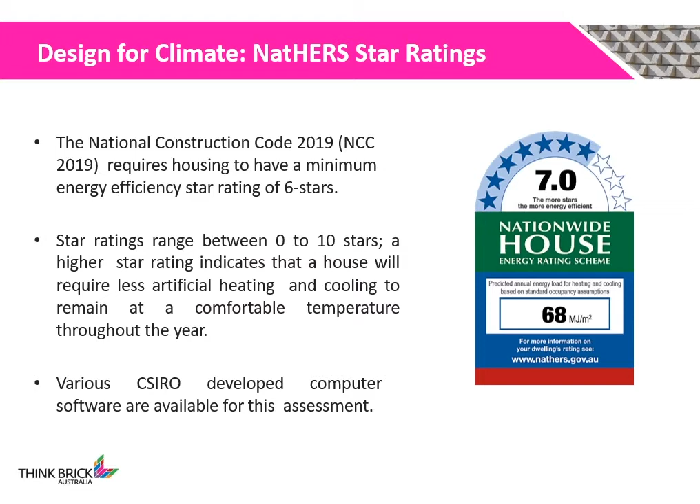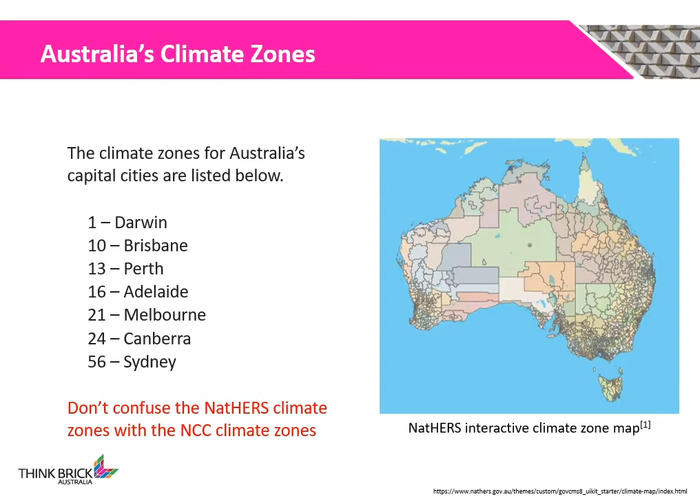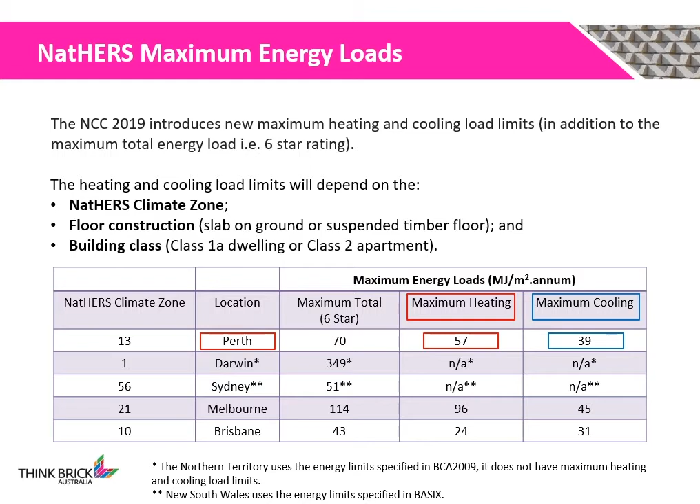Note that the Northern Territory and Darwin uses the energy limits as specified in BCA 2009, explaining the extremely high maximum total energy load. Furthermore, New South Wales uses its own measure for energy efficiency, BASIX, which is a different set of requirements but is accepted by NatHERS. We will briefly discuss this in the next slide.

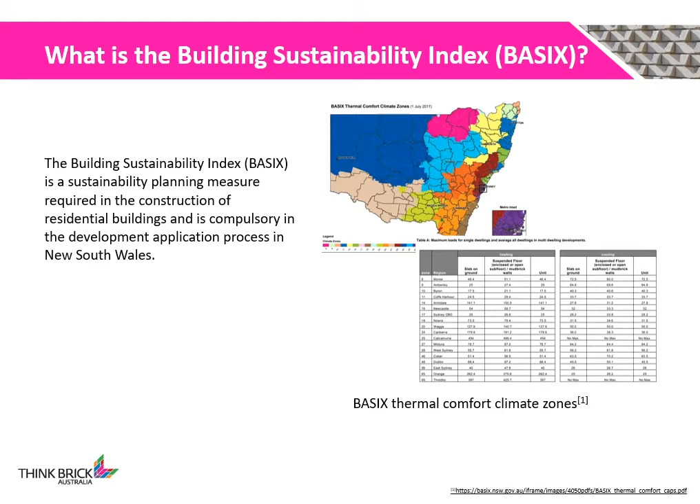The Building Sustainability Index, or BASIX, identifies design features that affect the level of energy consumption and water use in newly built houses or recently renovated homes. For New South Wales, BASIX governs the energy limits instead of NatHERS. The BASIX thermal comfort climate zones replace the climate zones used by NatHERS, and similarly, the maximum energy load would also be slightly different. More information can be found on the BASIX website.

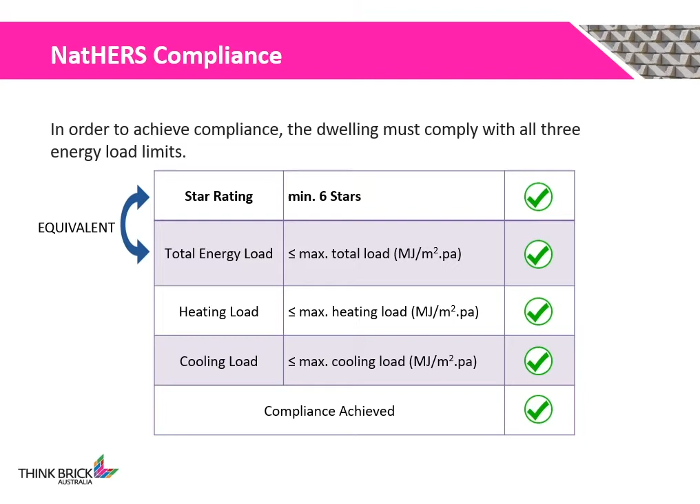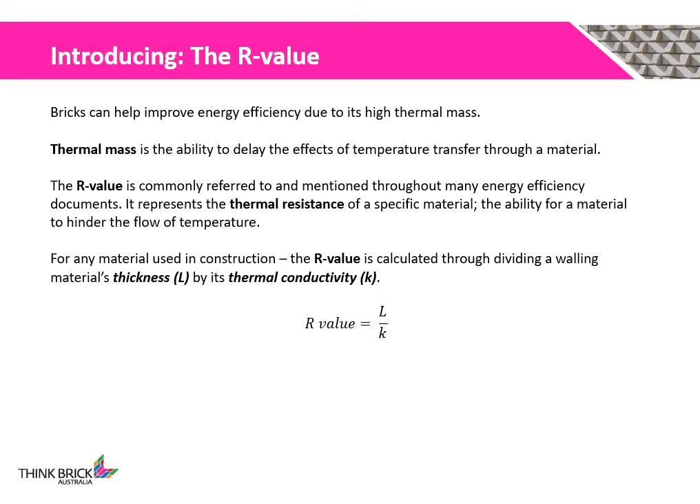The R value is the thermal resistance of a material, and thus it acts to slow the effects of temperature change. An R value is determined by the formula given: the thickness of the material in question divided by the thermal conductivity of the material. As brick has a relatively high R value and associated thermal mass, it exhibits the ability to regulate temperature throughout the diurnal cycle.

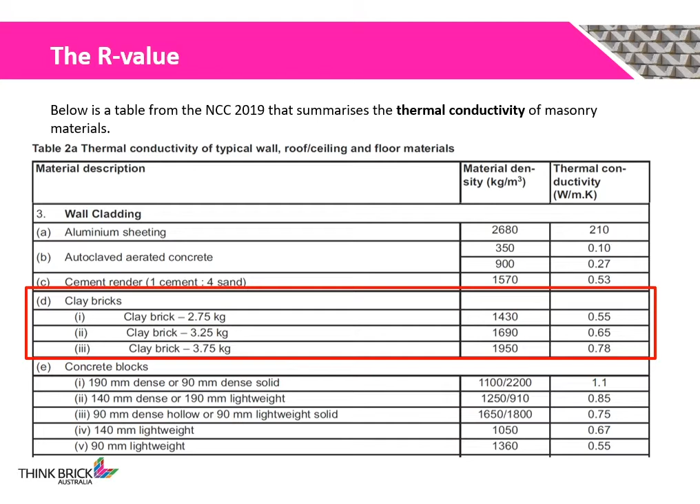A common question in the masonry industry is how the R value changes for composite materials. In this case, the solution is additive: simply calculate the R values for each different material and then add them together for the final R value. The following example showcases this.

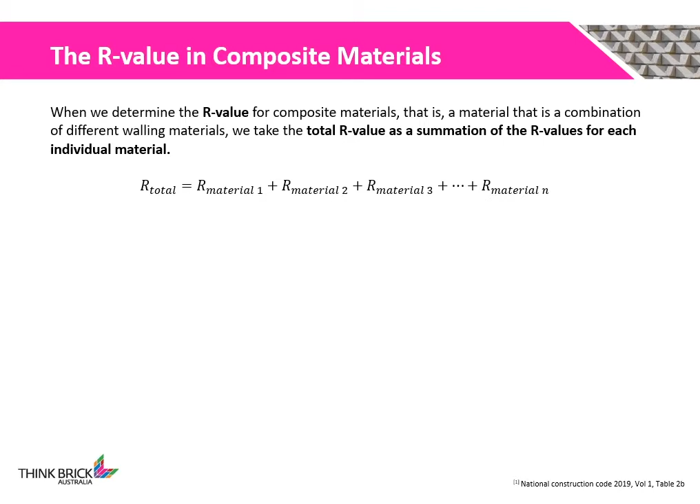Consider a double brick cavity wall with a 40mm air gap. We know that the width of a standard brick is 110mm. Assuming a 3.75 kg brick, it will have a thermal conductivity of 0.65 watts per meter Kelvin. The R value, as mentioned previously, is the thickness divided by the thermal conductivity. The calculated R value for the brick leaf will then be 0.11 divided by 0.65, giving us 0.17.

For the R value of a 40mm airspace that is non-reflective and unventilated, the NCC states that it will exhibit an R value of 0.17. The total R value will then be the summation of all three materials, including brick twice, once for each wall that we have. This gives us 0.17 plus 0.17 plus 0.17, and so the total R value is 0.51 meters squared Kelvin per watt.

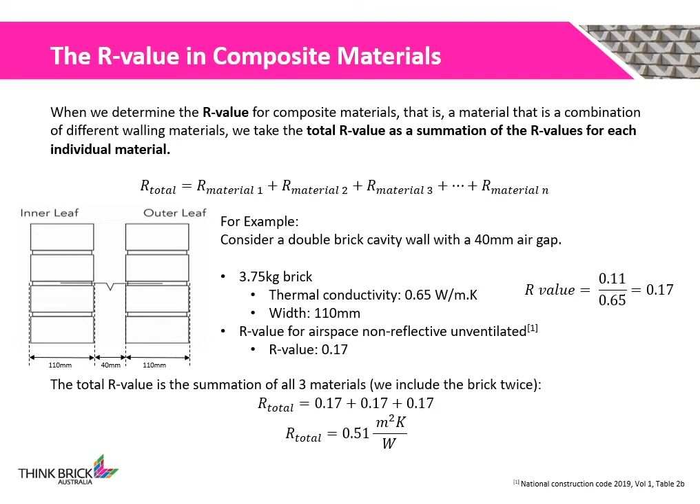An interesting note is that despite the air gap being almost a third the width of a brick, it provides the same R value. Air, as it turns out, is a very good thermal insulator.

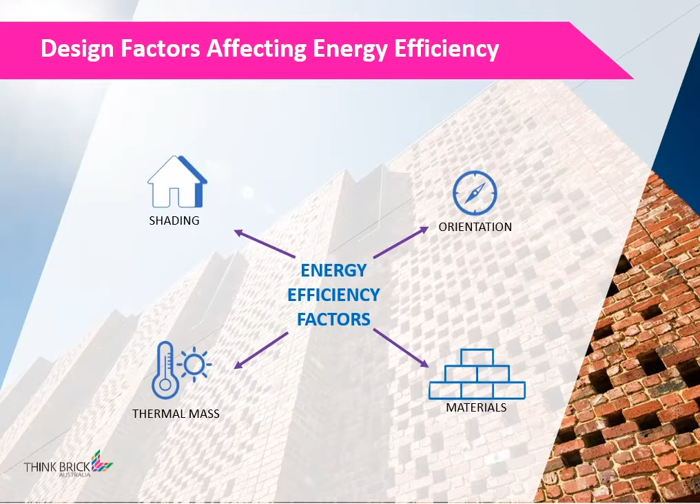In this following section, we will address the primary factors affecting energy efficiency. These include thermal mass, orientation of the dwelling, insulation, and shading. Do note that these factors are not exclusive; there are many other attributing factors to increasing energy efficiency.

Thermal mass is the property of a material to store and release energy. Using the idea of thermal lag, that is, the delay in time for the effects of heat and cold to become apparent through a material, thermal mass can assist in regulating internal temperatures throughout the day, absorbing heat in the day to release it at night when it is cooler.

Some materials with high thermal mass include brick, stone, concrete, and even water, as it can be used in water walls. Do note, however, materials with high thermal mass may have adverse effects in climates that have a constant temperature. In a warmer climate, you will absorb heat when it's warm, only to release it later when it is still warm. Thermal mass is an often overlooked factor in designing for energy efficiency.

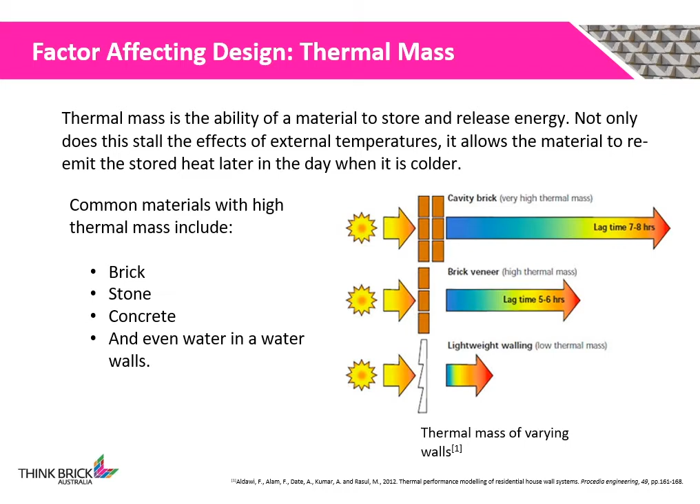House orientation refers to how a dwelling is positioned, and if it is optimal in utilizing climatic features to increase energy efficiency. Some examples of proper house orientation are positioning windows to catch the sun on colder winter mornings, or inversely, positioning windows to the north so you can catch a more consistent amount of heat and light throughout the day. Even positioning hallways to allow for an east-west wind may also increase cooling efficiency.

Do note that the arrangement of rooms within the layout of a house will also greatly affect the energy efficiency of the dwelling.

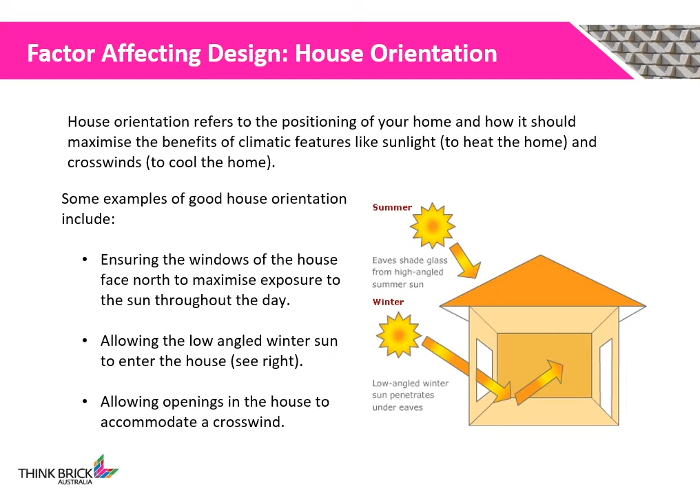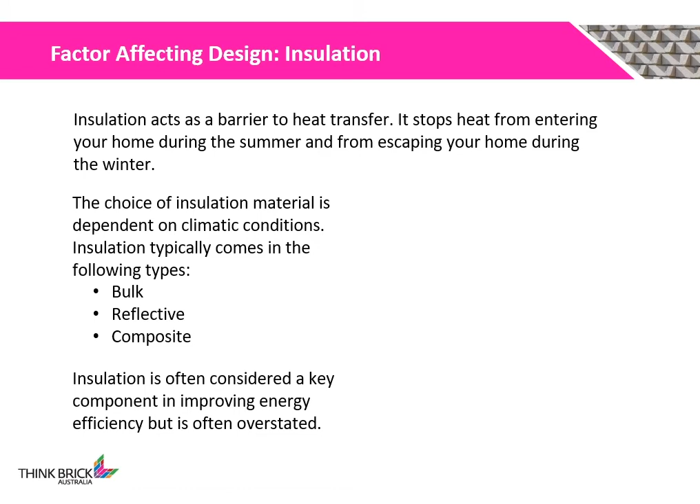Insulation is one of the most desired traits when considering factors for increasing energy efficiency, as it has the ability to stop heat, both from entering the home during the summer and from escaping the home during the winter. There are many options for insulation, like bulk, reflective, and composite, all with varying properties and cost. Although insulation remains a crucial component, it is an often overstated factor in determining energy efficiency.

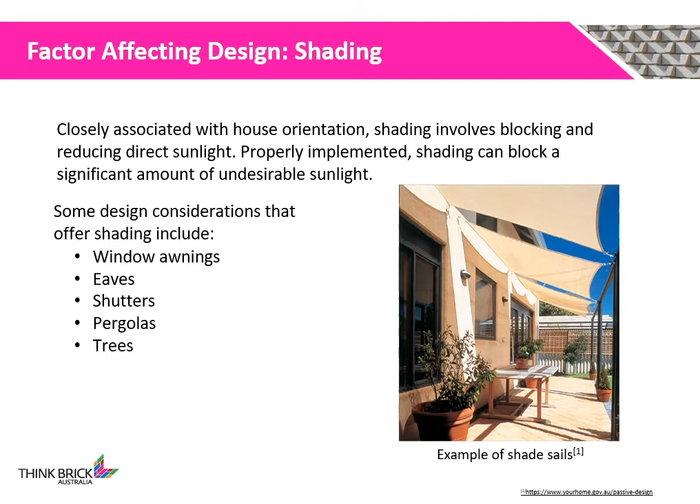Shading employs eaves, awnings, and other methods to either block out or mitigate sunlight striking the dwelling, effectively reducing some heating effects. Beware that improper shading, like blocking out the sun on a winter day, will result in more artificial heating required and a reduction in overall energy efficiency.

To reiterate, we have just gone through certain design considerations required in improving the energy efficiency of a dwelling. We do this to comply with the required 6-star energy rating as defined by NatHERS. Now we will see exactly how these design considerations play a part in improving energy efficiency in a build using FirstRate 5, a NatHERS certified software used to rate energy efficiency.

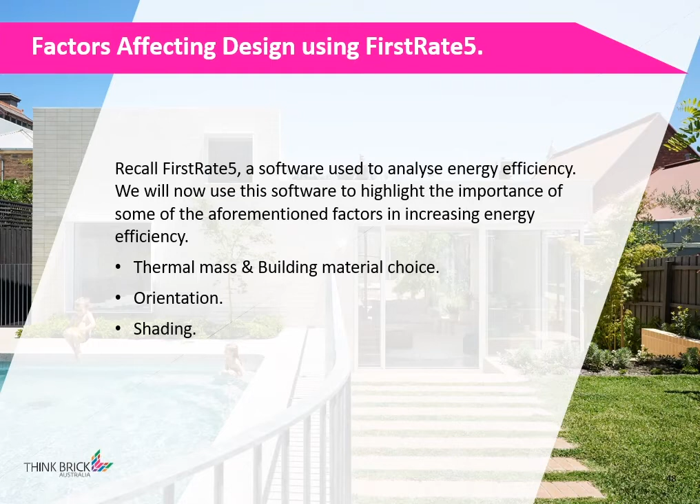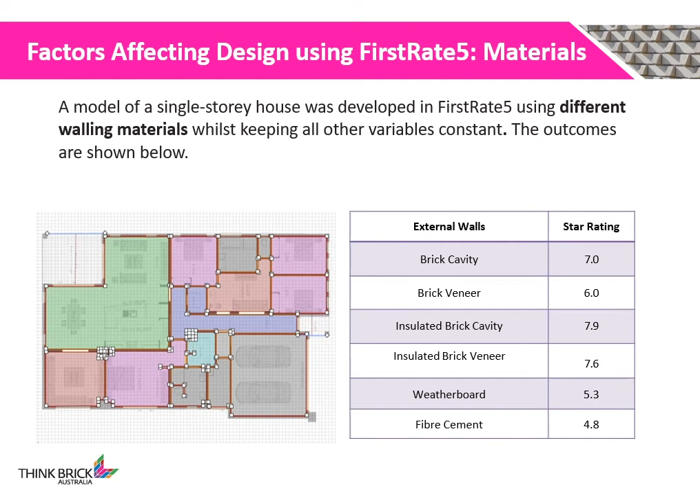To observe the effects of thermal mass and materials, this model house was created in FirstRate 5 using different walling materials and then analyzed. Keeping all other factors equal, the star rating of each type of construction is as follows. The following slides will translate these ratings into differences in internal temperatures during both summer and winter.

In the simulation, a brick cavity wall in the summer can make a household 11 degrees cooler when comparing the peak external and internal temperatures. Conversely, the same wall can make the internal temperatures of a dwelling up to 14 degrees warmer in the winter. It's no wonder why double brick cavity walls have the highest NatHERS star rating.

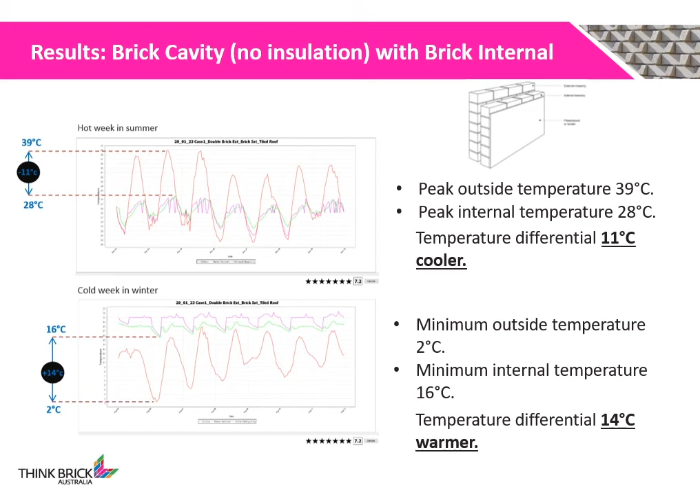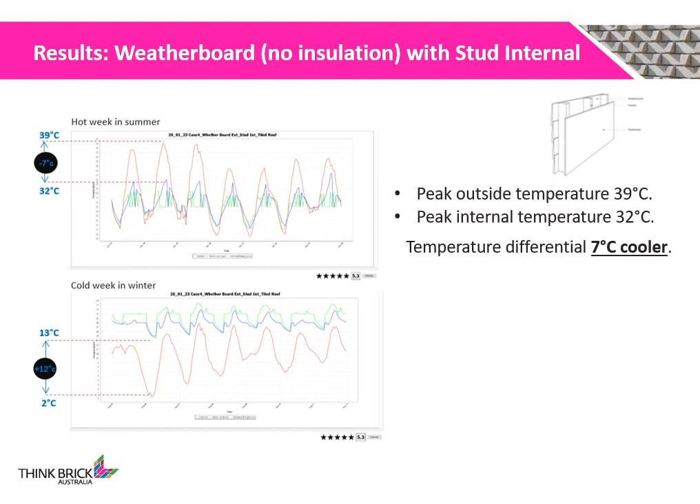In a weatherboard construction, the simulation shows us that the summer temperature differential is 7 degrees Celsius, whilst the winter differential will be 12 degrees Celsius. It is clear to see that the materials used in the construction of a dwelling will have notable effects on thermal comfort. As you can see, material choice is a critical component in increasing energy efficiency.

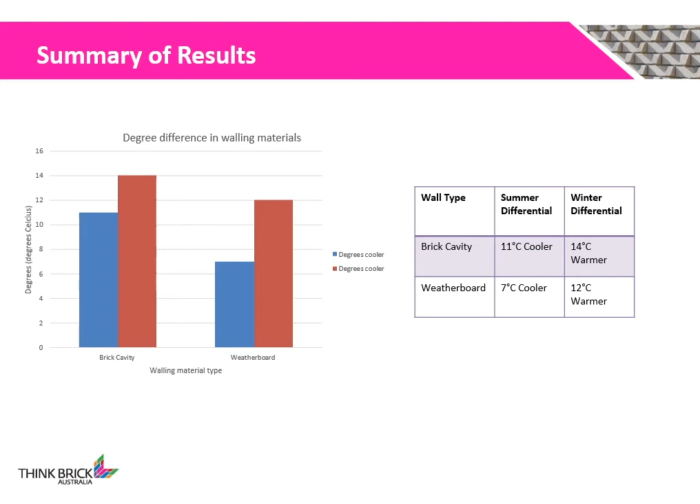In both hot and cold climates, a brick cavity wall will exhibit more favorable internal temperatures when compared to a weatherboard wall. To observe the effects of house orientation, we will leave all other factors equal but change the facing of the house.

The plan view below shows a typical north facing, and this gives us an energy star rating of 7. By changing the direction of facing to west and east, we achieve a rating of 6.8 and 7.4 respectively. This discrepancy is notable. A change of 0.6 between maximum and minimum energy ratings can easily determine whether or not your dwelling fails the energy efficiency standard.

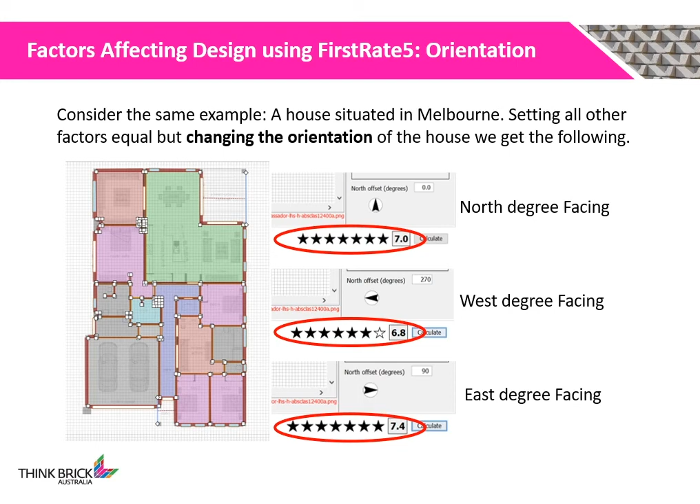Now let's analyze the effects of shading. In this control model, a large eave covers the patio and a smaller eave covers the front door. Both of these can be seen in the plan view of the house. The energy efficiency rating that FirstRate 5 gives us is 7.1.

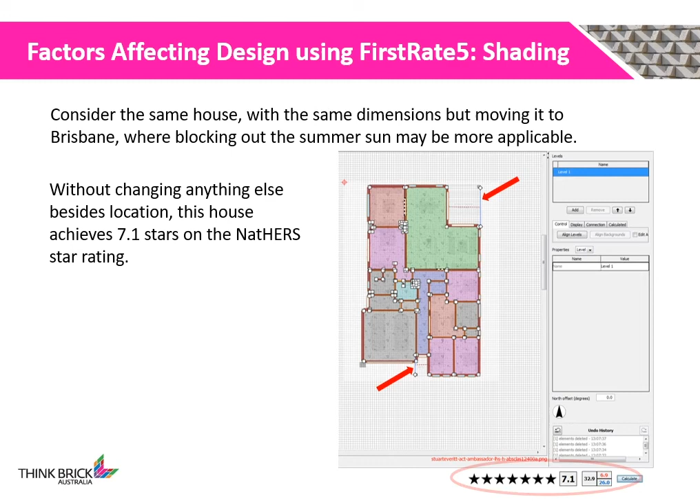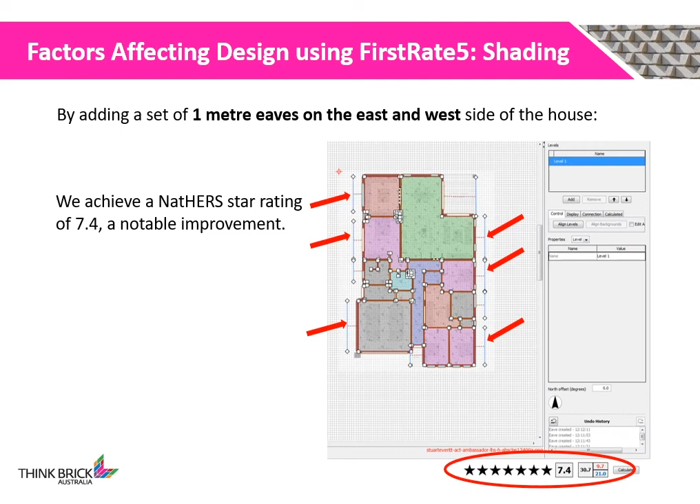Keeping everything else equal, we now apply eaves on the east and west walls of the house. The provided shading increases the energy efficiency rating to 7.4. If we think about this, it makes sense. The eaves block out the sunlight during the morning and the afternoon, reducing the amount of energy required to cool the house at these times.

What would happen, however, if we were to put eaves on the north and south sides of the house? The star rating will be slightly reduced to a value of 7. The eaves are not properly positioned to block the harsh summer sun, and they also make the house unnecessarily cool in the winter, thus increasing artificial heating. From this example, it can be seen that improper installation of shading will have negative effects on energy efficiency.